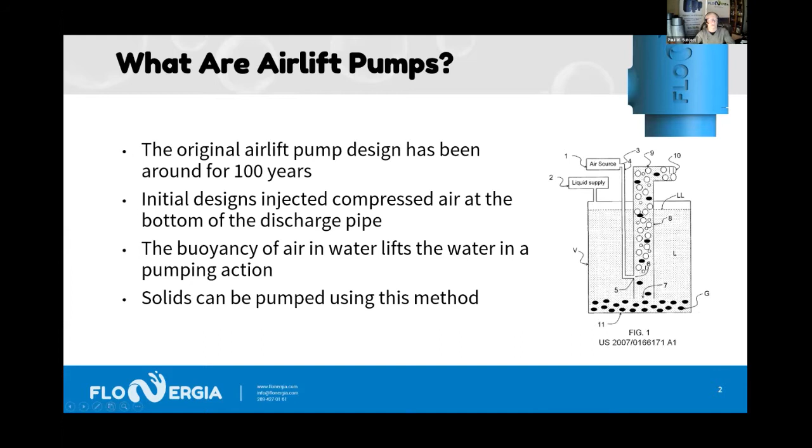So the energy footprint of these pumps is quite interesting. If you think about it, the only motive power is the compressed air, so the energy to deliver that air is the thing that actually drives the pump. There's no separate electrical motor running rotating mechanisms. By buoyancy, the air, which has a lower density than the liquid, causes the liquid to rise fairly quickly, which creates the pumping action. In terms of fluid pressure, the liquid is taken in the ascendant airflow and moves in the same direction as the air. So the physics is quite simple, and the calculation of the volume flow of the fluid is possible based on the physics of this two-phase flow.

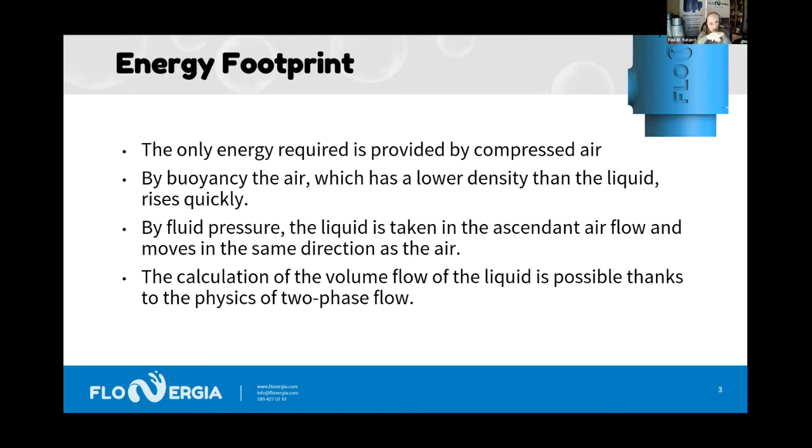So what are the advantages of airlift pumps? Well, they're very reliable. There's no moving parts except for the delivery of the air. Liquid being pumped is not in contact with any mechanical elements. Therefore, the airlift pump is not abraded by anything abrasive, like sand or debris. Additionally, depending on how the air is delivered, airlift pumps actually act as water aeration devices and can lift stagnant bottom water to the surface. Now, since there's no restrictive pump parts, solids generally up to 70% of the pipe diameter of the airlift pump can be lifted.

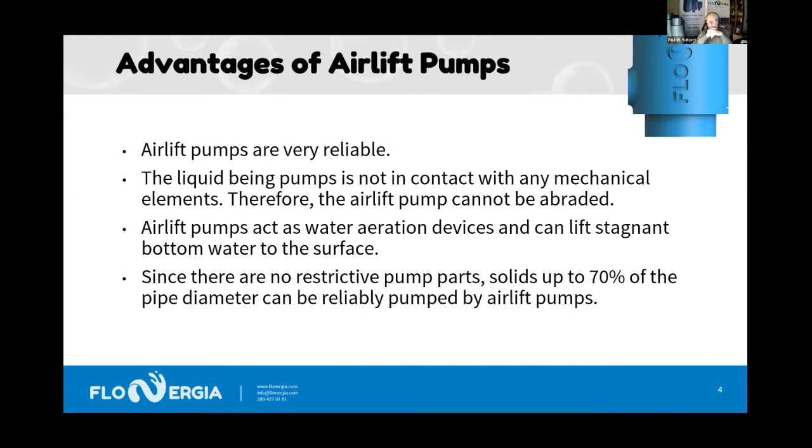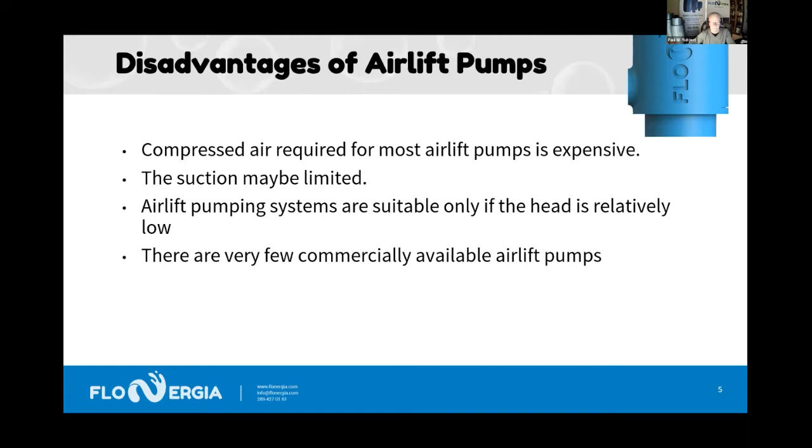All very good, right? Problem is, there's some disadvantages to airlift pumps. Compressed air required for most airlift pumps is expensive to produce. Suction can be limited depending on design. And airlift pumping systems are only suitable if the head is relatively low. And lastly, but certainly not leastly, there's very few commercially available airlift pumps. If you search on the internet, you probably won't find any except for one. This has occurred because the lack of design optimization over the last 50 years shows there's no real advantage using airlift pumps.

New innovations that are out there now have started to solve some of these flaws in the original design. And of course, our company has completely re-engineered the airlift pump to solve a number of these issues. So I'd like to talk a little bit about our technology.

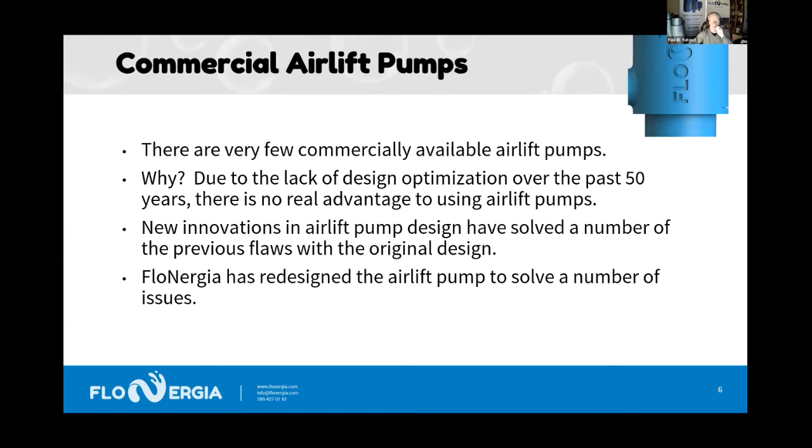Our company was incorporated back in 2016, and the technology that we have commercialized was developed at the engineering department of the University of Guelph in Ontario, Canada. Our patent pending technology is currently being sold to aquaculture, agriculture, and wastewater markets around the world. And in India, Everest Turbo is our exclusive distribution partner.

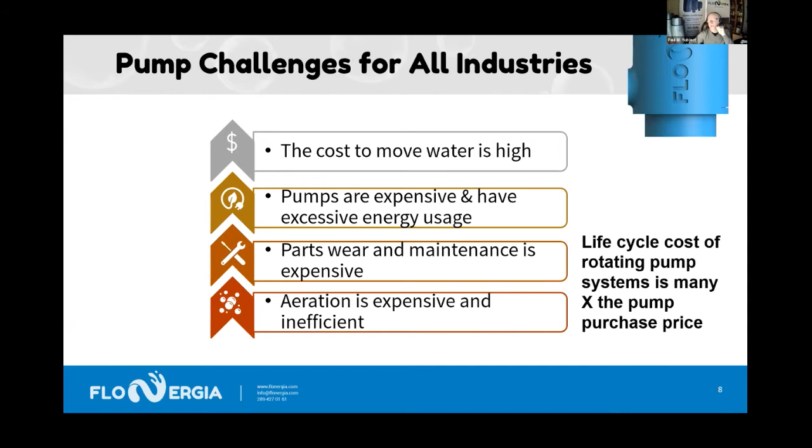Now, as you know, you've been listening to people talk about pumps all day. The challenge with pumps is that the cost to move water is high. Pumps generally are expensive and use a lot of energy. Parts wear and maintenance clearly is a challenge, and aeration is expensive and inefficient. And the life cycle cost of a pump and its rotating systems are many times the initial purchase price.

So how does our technology solve these problems and the problems in general of airlift pumps that were designed more than 100 years ago? Well, our technology only uses the aeration alone to both pump and aerate water. So the energy you use to drive your aeration system or your blower is what's needed to run our pump and aerate the water simultaneously.

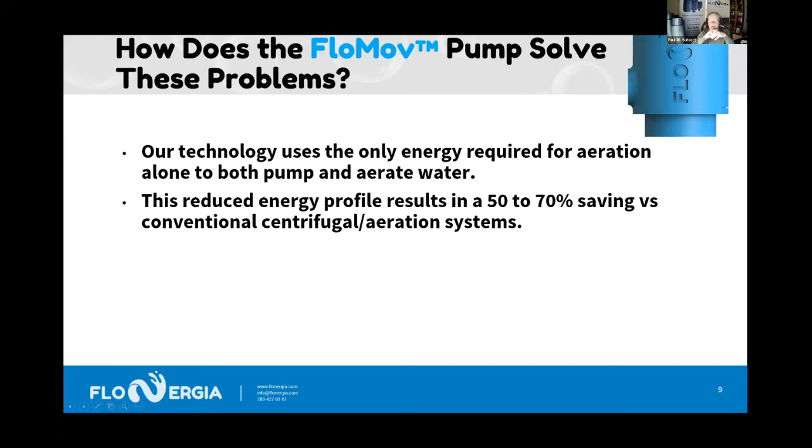This reduced energy profile results in a 50 to 70% energy savings because we're removing the conventional pump out of the system. Our airlift pumps have no moving parts, and as a result, they have very little maintenance. Our airlift pumps have exceptional aeration properties versus conventional systems, generally up to 40% better aeration efficiency versus paddle wheels and surface sprays.

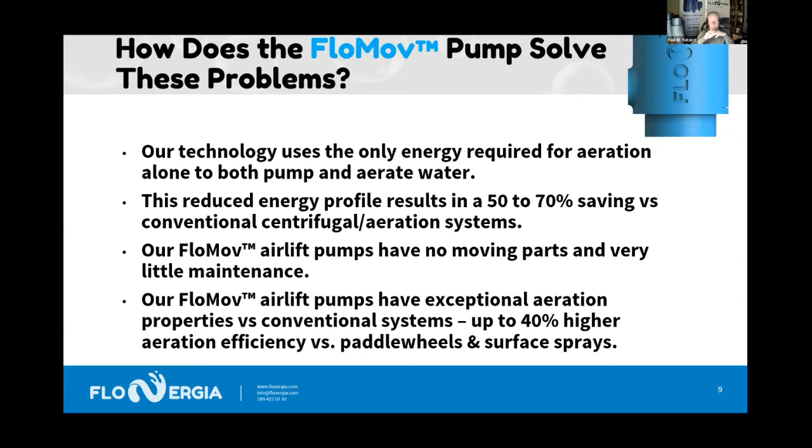So what's different? Well, Josh is going to talk a little bit about this in greater detail, but our pump has been optimized using computational fluid dynamics to flow and aerate simultaneously and to optimize the multiphasic behavior of the pump so that it maximizes the output, but also maximizes aeration. Additionally, we used finite element analysis to design the pump to ensure that it will withstand the operational stresses that we experience on a daily basis.

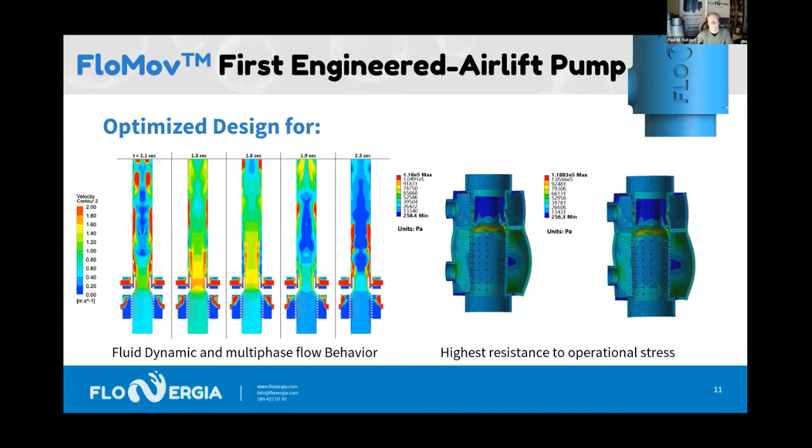So essentially, our airlift pump is the first engineered airlift pump system that's on the market. By removing the actual centrifugal pump and the power to run it, and removing the paddle wheels and the power to run those, and combining those into one system using a standard regenerative blower, our system, with no moving parts, very low initial cost and extremely little maintenance, and a reduced energy profile, results in pumping simultaneous with aeration. And of course, we can pump solids, liquids, and solid liquid mixtures.

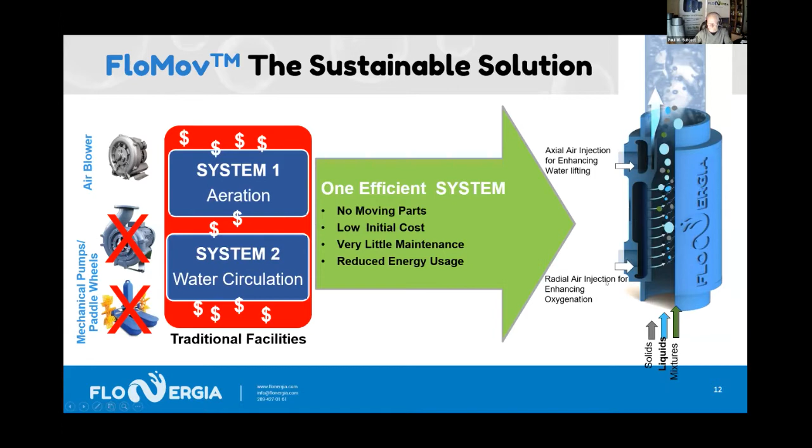You can see a cutaway version of our pump here on the right-hand side of the screen. At the top, you see where we inject air, which creates a piston, or what we call slug flow, of air that lifts the water. And the bottom port is where we inject air to enhance oxygenation and aeration. So by using the power required from the air itself to generate the airflow and from the blower, we lift and aerate simultaneously. There's no additional power needed to pump water. This results in a 50 to 70% energy savings, 40% better aeration efficiency, and substantially reduced maintenance, essentially zero.

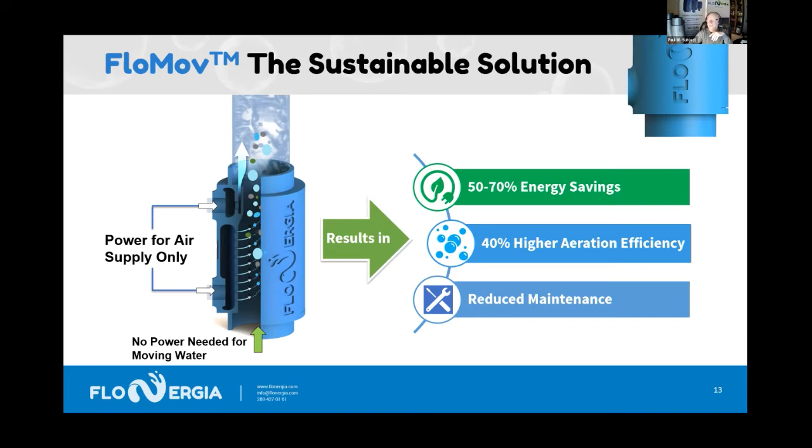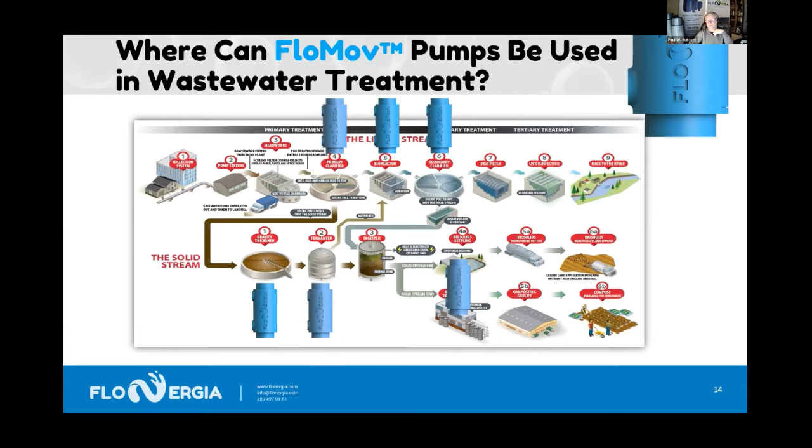So talk about some applications, and Josh is going to talk in greater detail about some of these. Our pumps can be used throughout every operation where you need to move water from one location to another. But I've chosen wastewater here because it's an easy application for our technology. So we can be used to transfer fluids from one location to another, to pump heavier materials, and to deal with sludge.

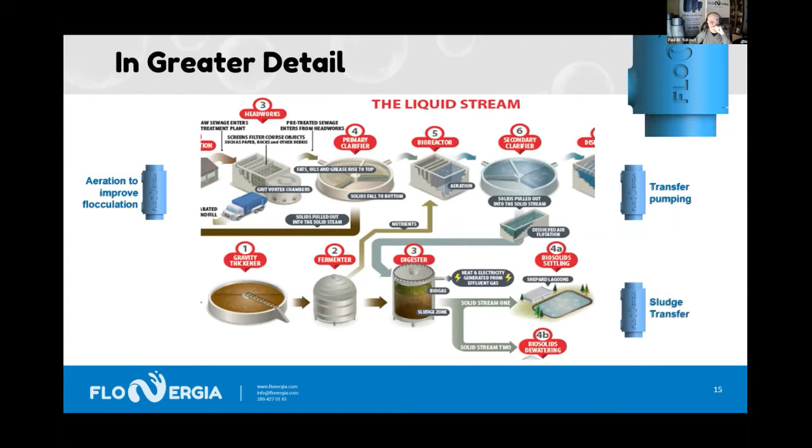So looking in greater detail, if aeration is required to improve flocculation in a waste stream, our pumps can do that. To transfer from one tank to another tank, our pumps can do that. And to transfer heavy sludge, heavy materials, and Josh will talk about the materials we can pump with our technology, our pumps can do that.

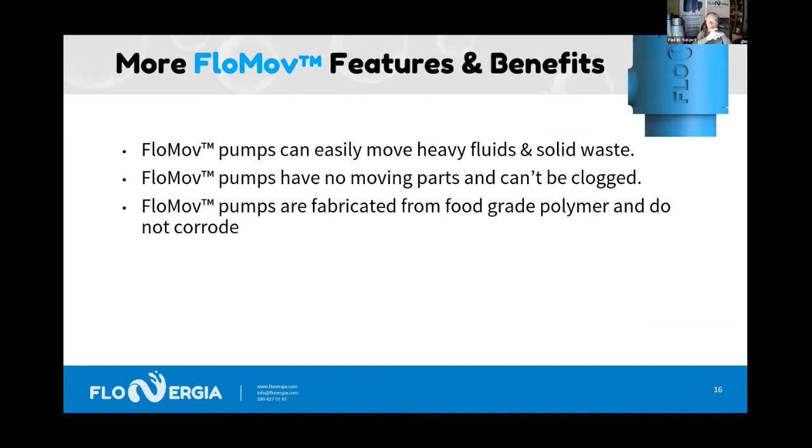So some additional features and benefits. As I said, our pumps can easily move heavy fluids and solid waste. We have no moving parts. It's very difficult to clog our pumps. As a matter of fact, we pump fish in the aquaculture business. Our pumps are fabricated from food-grade polymer and can't be corroded. Our pumps facilitate carbon dioxide removal if that's a necessary part of your process. Our pumps disrupt thermal stratification because of the upwelling nature of how our pumps work, and our pumps improve dissolved oxygen. We have pump capacities in a range up to 2,685 liters per minute, which is 44 liters per second.

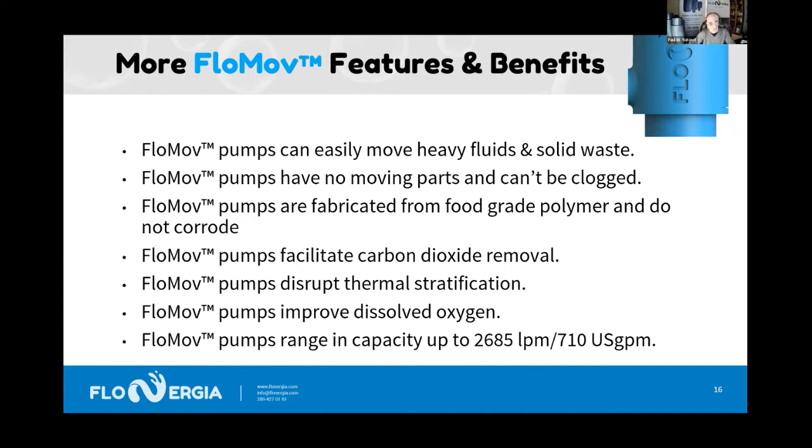Spend a little time talking about our size range. Of course, we have pumps up to 8 inches in size, and the 8-inch size is the size of the pipe that the pump uses. Our smaller pumps, we have a small 1/2-inch pump, which is used by aquarium people. Actually, it's a very cute little pump. Josh, do you have a 1/2-inch pump there that you can hold up? Probably not with me here now. Okay, as you can imagine, it's about as big as your finger. It's a great little piece of technology.

But our 1/2-inch, 1-inch, and 2-inch units are printed in 3D food grade polymer. And our 4, 6, and 8 inch units, and I have the 6 and 8 here beside me, these units are made of standard PVC piping material, and they're fabricated. All of our pumps are currently manufactured here in Canada.

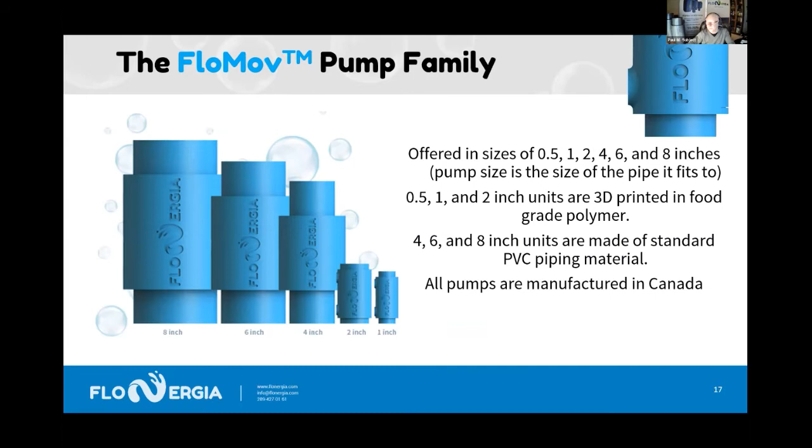Spend a little time on our pump curves. These pump curves are a little different than probably what you're used to seeing, but they show the airflow rate across the x-axis and the resultant water flow rate across the y-axis, both in liters and gallons per minute, and in cubic feet per minute and liters per second in terms of airflow.

Josh is going to spend a bit of time talking about the efficiency ratio, which we call the submergence ratio. But you can see the curves here for each one of our pump sizes. Essentially, at the 50% submergence ratio, our pumps start to work up to the 90% submergence ratio. Below 50%, our pumps are not really that effective. Josh is going to talk more about how you read this curve and when you use this curve in a few moments. The top rate is the airflow required to operate the pump, and this is the resultant output on the y-axis.

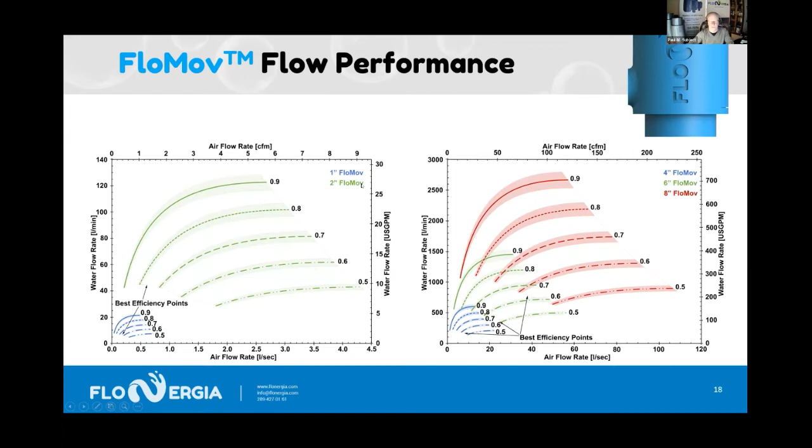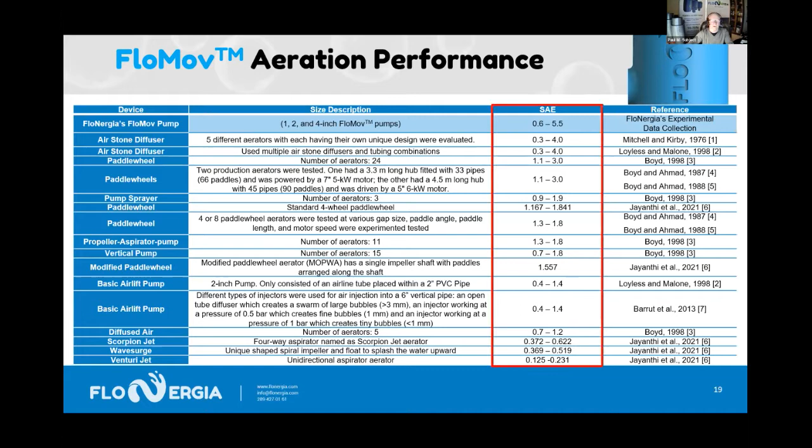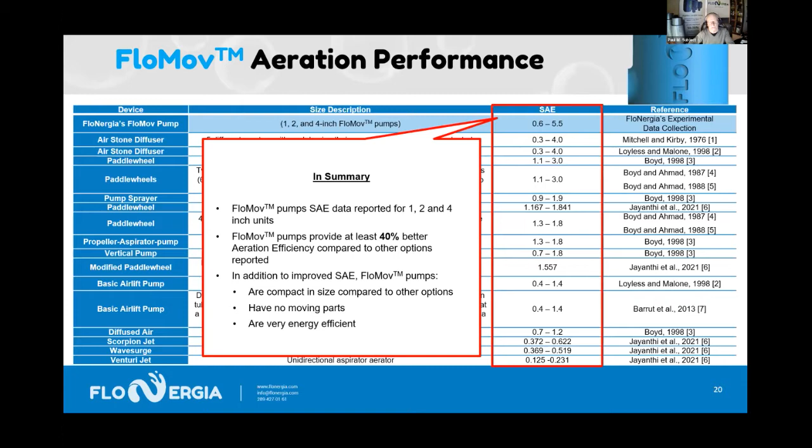Just to spend a few moments on aeration performance, because that's a fundamental component of our technology, we compared our 1-inch, 2-inch, and 4-inch FloMov pumps to a number of different types of aeration systems using the standard aeration efficiency, which is the typical standard used in aeration technology. What we found is that our pumps delivered 40% better performance than all of these other types of systems, including diffusers, paddle wheels, surface sprays, and venturis. So in one device, you get both pumping and aeration, which we think is quite interesting, with no moving parts and extremely energy efficient.

I'm going to talk about a few particular examples of where we're installed around the world, where we have more than 100 installations of our technology. In Canada, in an aquaculture operation, we've got a 40,000 gallon tank where we're pumping 3,600 gallons per minute. In Chile, at a company called AquaChile, the second largest salmon producer in the world, we have an 80,000 gallon tank where we're pumping 9,600 gallons per minute. One of our installations in India is a wastewater settling tank where we transfer heavy sludge, a 10,000 gallon tank at 120 gallons per minute.

So our approach to the global market is quite simple. We have direct sales to key customers. We do license our technology in certain jurisdictions, but we really have partnerships with consultants, engineers, and system designers, and primarily our distributors. In India, of course, that's Everest Blower. Together with our colleagues at Everest, we'd like to work with appropriate companies to find customers for demonstrations and to work with customer engineers and consultants for easy integration into their existing systems.

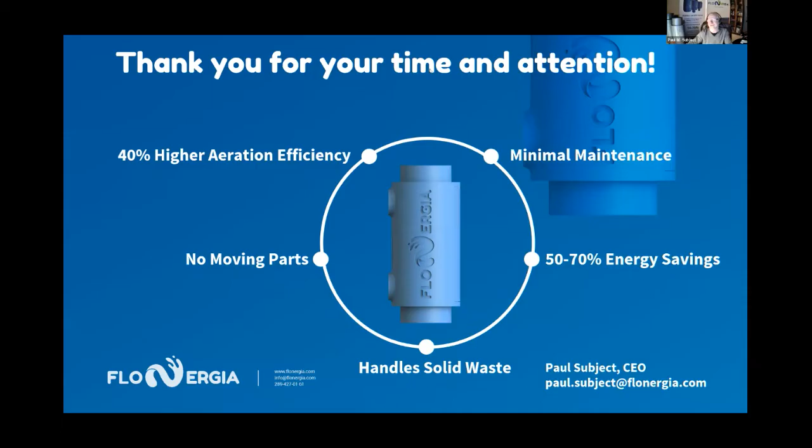That's the end of my presentation. I'm going to hand over the presentation now to Josh, and he'll talk about how you actually apply our pumps on a regular daily basis, actually how he does it every day. Go ahead, Josh. Thank you, Paul, for that great presentation.

Thank you all for coming to listen to our presentations. As Paul mentioned, I'm the application engineer at FloNergia. I'm going to be running through an introduction to the application of our Airlift pumps and going over some of the technical data for operating our pumps, how to set up and install our pumps, as well as maintaining our pumps.

As Paul mentioned, our Airlift pumps are a great energy efficient solution because we combine two systems into one. By using the air blower from the aeration system and injecting air into our Airlift pump, we can pump and circulate water while simultaneously aerating the water.

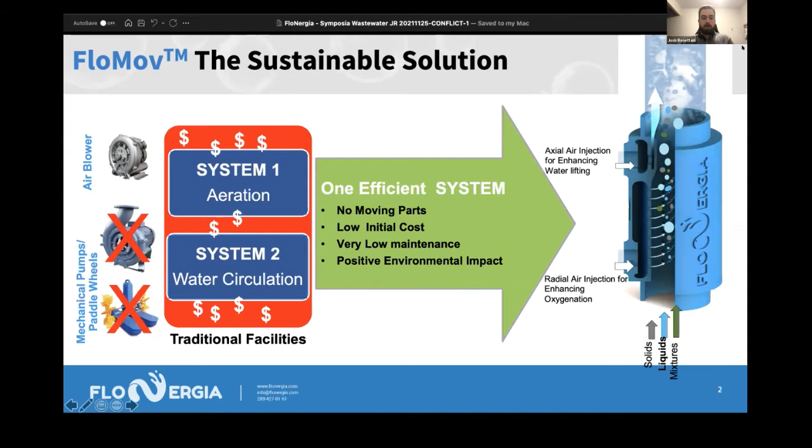Some applications that our Airlift pumps are great for include aeration pumping, aquaponics, fish farming systems, hydroponics, heavy liquid pumping, and wastewater pumping—pretty much any application that needs to transfer fluid from A to B. It doesn't really matter what fluid that is. We've pumped heavy metals with density 6 times that of water. We've also pumped sludge and slurries in the lab with highly viscous shear forces acting on the flow. Any kind of liquid our pump can handle.

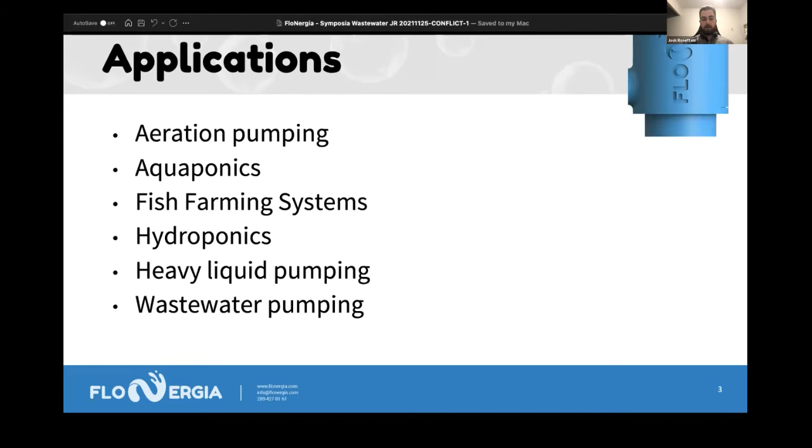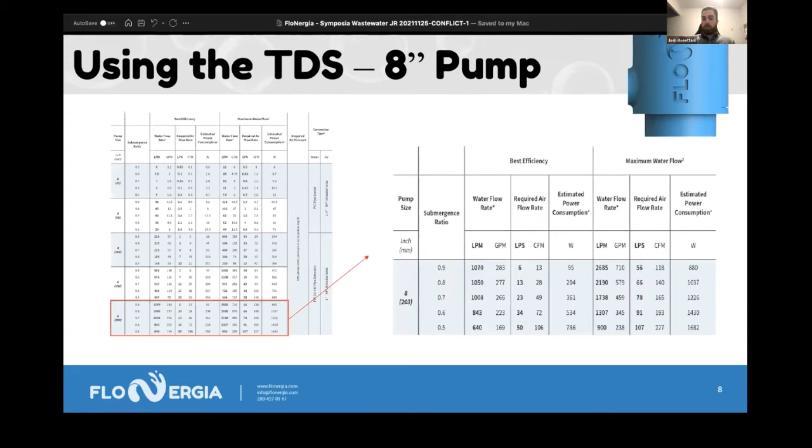The submergence ratio, by definition, is just the static head divided by the total length. The total length is made up of the static lift and the static head. The static head is how deep you place the airlift pump at the point of injection under the water level, and the static lift is how high above the water level you want to pump the water.

Let's look at an example where we keep the static head constant, say at 1 meter, and start increasing the static lift. By definition, when we keep the static head constant and increase the static lift, we're reducing the submergence ratio. So when we want to move water, we need to inject more air or energy into the pump to overcome the static lift. That's why as the submergence ratio slightly decreases, the performance decreases as well, because we need to overcome the static lift.

So a few examples of calculating the submergence ratio: let's say the static head is 4 meters and the static lift is 1 meter. Then the static head divided by the total length is just 4/5, which is 80%.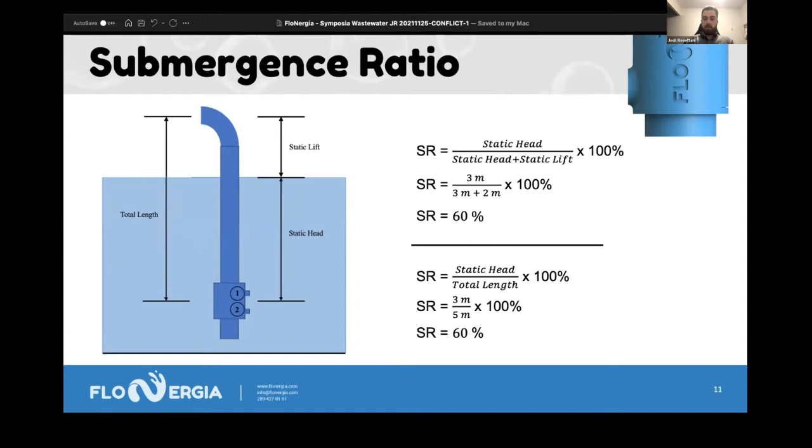Another example: let's say the static head is 3 meters and the static lift is 2 meters. Then the static head divided by the total length is just 3/5. And that's how we go about calculating the different submergence ratios of the systems we work with.

For customers, the pump performance curves, as Paul showed you earlier, highlight the table we just discussed, as well as the different submergence ratios. The figure on the left shows our 1-inch and 2-inch pump, while on the right is our 4, 6, and 8-inch pump.

The y-axis is the water flow rate, and the x-axis is the air flow rate we need to inject into our pump. Each size pump has 5 curves, one for each of the different submergence ratios that can be used, which we just discussed how to calculate. For each curve, the beginning highlights the best efficiency point, and the tail end is the maximum water flow rate achieved for each size pump at each submergence ratio.

To run through a quick example of how we use these charts to size our airlift pumps: let's say we have a customer that needs 100 liters per minute of water flow rate. We could draw a horizontal line across from the water flow rate, and if we're operating at 0.9 submergence, find the intersection point and draw a line vertically downwards to see how much airflow we need to achieve the 100 liters per minute. At 0.9 submergence, if we inject 0.9 liters per second of air, we can achieve the 100 liters per minute. However, let's say the system is operating at 80% submergence.

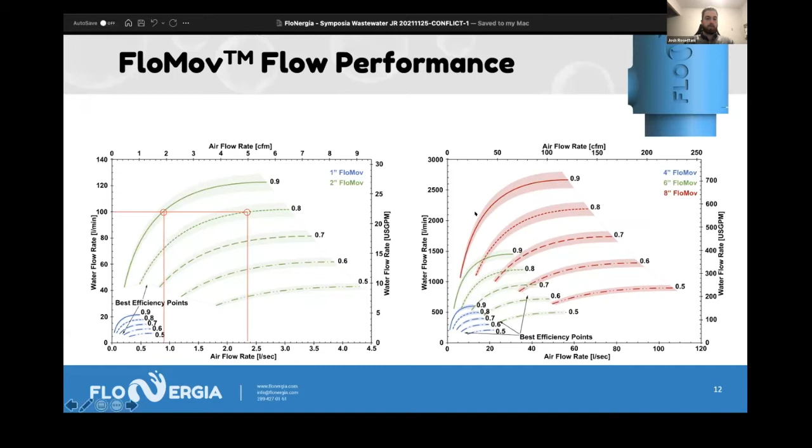Then we continue to draw that line across from the 100 liters per minute till it intersects the 0.8 submergence line. From here, we draw the line downwards, and we see that we need approximately 2.35 liters per second of air at 0.8 submergence to achieve that same 100 liters per minute. That's how we read our pump performance curves.

Now, to get into the setup of our airlift pumps, we designed them to work well with just PVC piping and fittings, so they can be commonly used across the world. So the materials needed are just PVC piping, elbows, and some coupling or flexible coupling to assemble our airlift pump system.

To operate the pump, we need a blower or an air source to move air through air lines that can be injected into our airlift pump through some hose barb or push connect fittings.

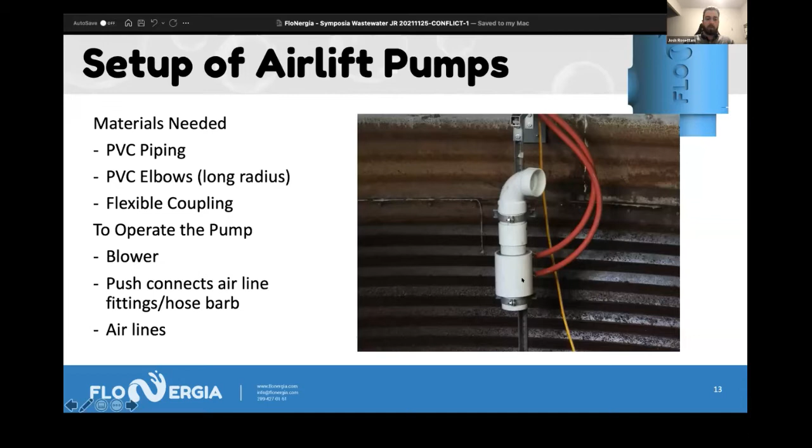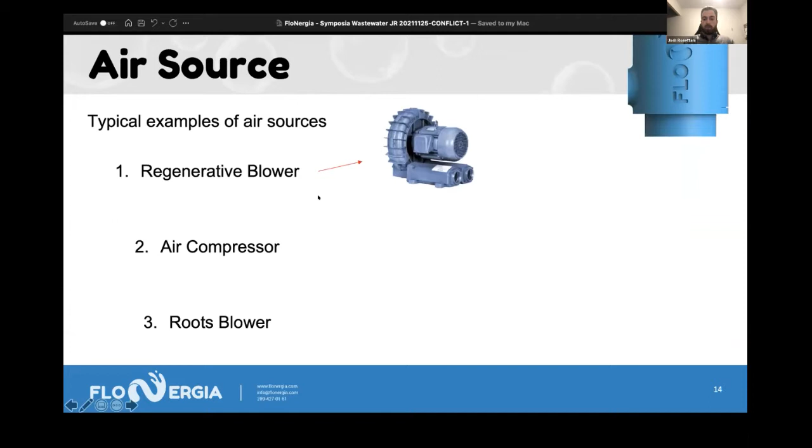Looking at the air sources that can be used: one is a regenerative blower, which we typically recommend to all our customers, as this is probably the most efficient way to generate a high volume of air at low pressure. Other air sources can be an air compressor or a roots blower that generates air at high pressure. We like to recommend the regenerative blower because most of our applications are at low pressure, so we can generate high volume at better efficiencies.

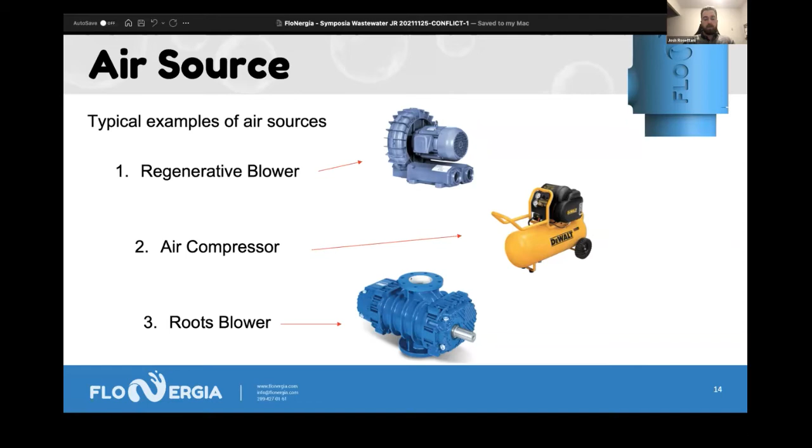So I'm going to go through an air blower curve to see how much volume of air we can generate from a regenerative blower. This is just pulled off the internet and is typical for regenerative blowers, and it corresponds to our airlift pumps, because then we can see how much air we can generate and how many airlift pumps we can hook up to one blower.

For example, if we place our airlift pump 1 meter below the water surface, the hydrostatic pressure in the system is going to be that 1 meter, or 40 inches, of water column pressure. Similarly to our pump curves, the pressure is on the y-axis instead of water flow rate for these air blower curves, and the x-axis is the volume of air that can be generated. So at 40 inches of pressure, we can draw the line horizontally across to intersect the model of the regenerative blower we're using.

For this case, we're just going to use the red dotted line. We find the intersection point and draw our line downwards to see that for this model, we can generate 80 CFM, or 37 liters per second. So from here, we can look at our pump performance curves and see that we can get 37 liters per second from the regenerative blower. How many airlift pumps can we hook up to one blower?

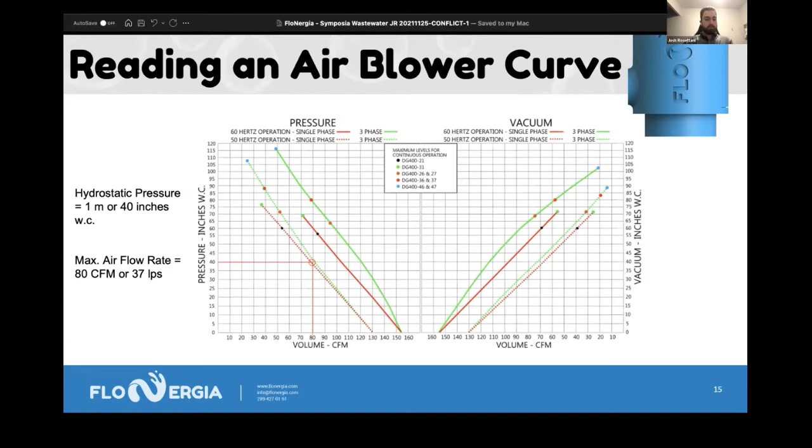Next, I'm going to get into the installation process of our airlift pumps. Each airlift pump comes with an engraving of an arrow pointing towards our axial injection port. We want to orient the arrow pointing towards the surface of the water so that the pump is pumping water vertically upwards, with the axial injection on top.

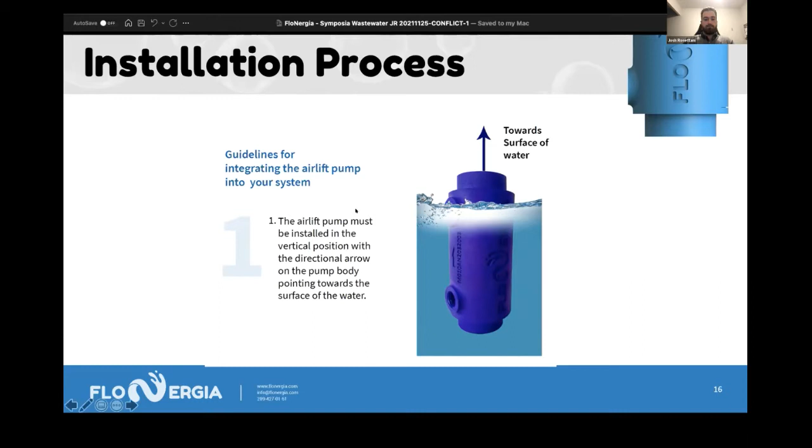Each of our pumps has threads to fit either push connects or hose barbs to connect air lines later in the process. Because our pumps are designed to fit well with PVC piping, the PVC pipe can just be fitted into the top of our airlift pump. But to secure the piping and system, we suggest using flexible coupling so that later on, if we need to remove the pump, we can.

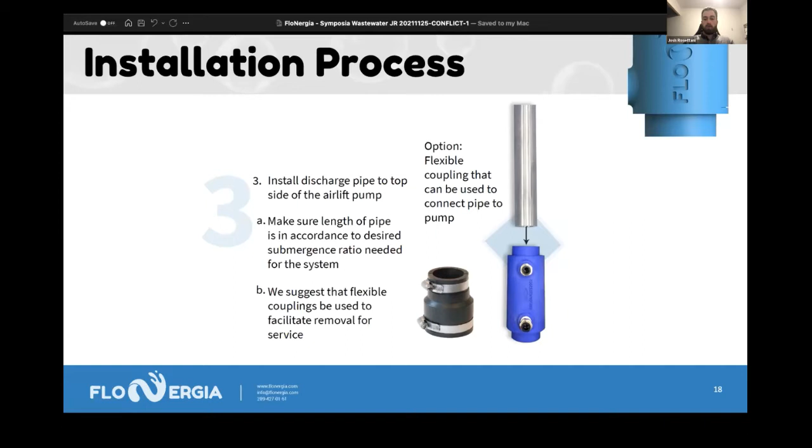Then at the top of the riser pipe, we can install a 90-degree elbow just to direct the water flow coming from the riser pipe.

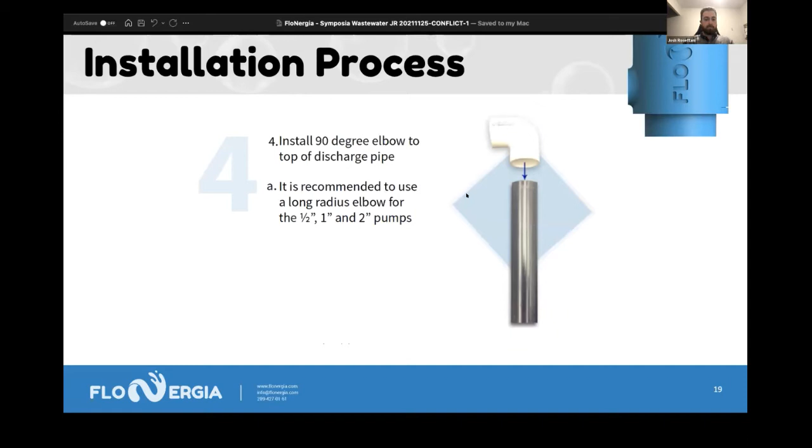Next, for some applications, we can also install an intake pipe at the bottom of the airlift pump. This is generally for applications where we want to pick up solids off the bottom of the tank. We place the intake pipe at the bottom of the pump so its inlet is at the bottom of the tank, where solids can be suctioned up the pipe and then pumped through our airlift pump.

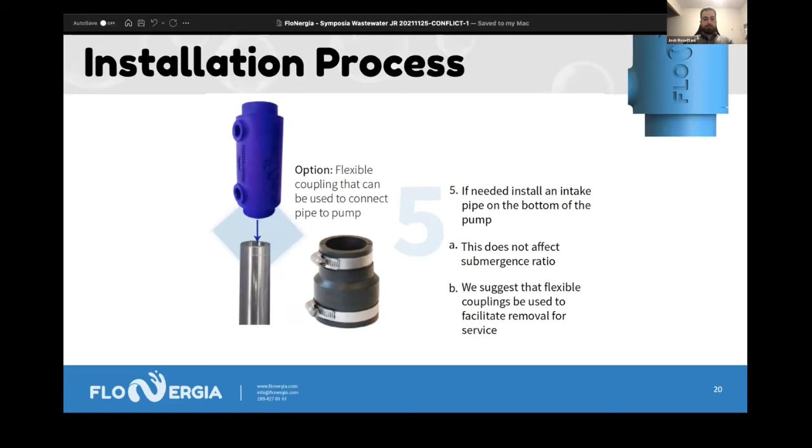Lastly, we connect the air lines from the air source into the two injection ports of our airlift pump.

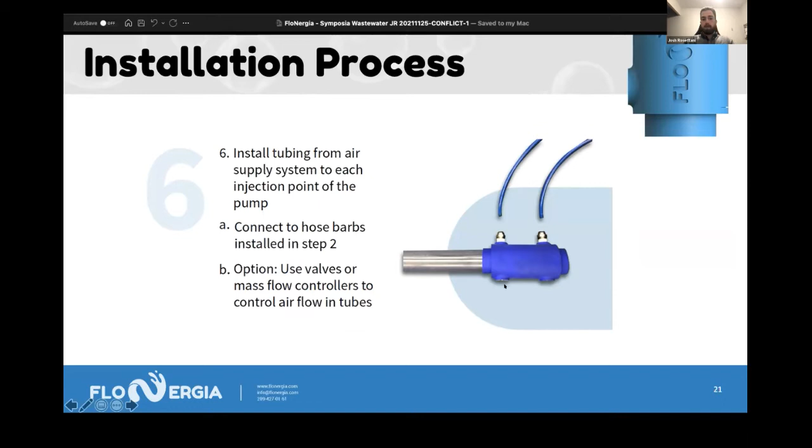Here's another example of our airlift pump system. We have four 4-inch airlift pumps that were placed into a raceway system here in Canada. We also need to build a frame or support system, using pipe clamps to secure our airlift pumps to the frame. In this case, since it was a raceway, we could just secure our pumps to the frame and submerge it under the water, which helps stabilize the pumps and keep them vertically straight.

This frame can be made out of any locally sourced material, just to secure our pumps to the frame so that they're not moving while in operation.

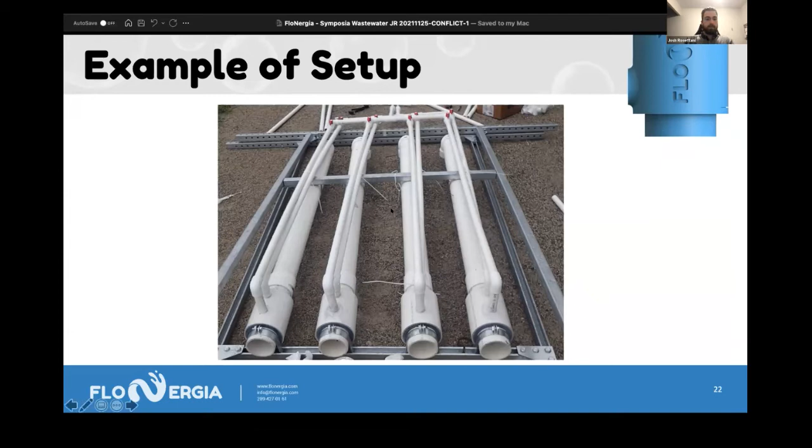So we've been talking about our dual injection airlift pump. Paul briefly mentioned that each port has its own purpose. Our axial air injection, when we inject the air, is directed vertically upwards to enhance water lifting, and this enhances the flow pattern seen inside the pipe. When we talk about slug flow, it's a large bubble that acts as a piston inside the pipe riser, lifting the water above the slug bubble.

So we use the axial air injection to enhance water flow, while the radial injection is comprised of small holes that, as air passes through, create bubbles, enhancing oxygenation in the water. Each port was designed specifically for its purpose: water lifting or oxygenation.

For most applications, we recommend 50% of the air go through the axial port and 50% through the radial port. However, if customers are more concerned with increasing liquid lifting, we'll recommend putting 75% of the air through the axial port and the remaining 25% through the radial port. If the customer is more concerned with increasing oxygenation in the water, we'll recommend 75% of the air go through the radial injection and 25% through the axial injection.

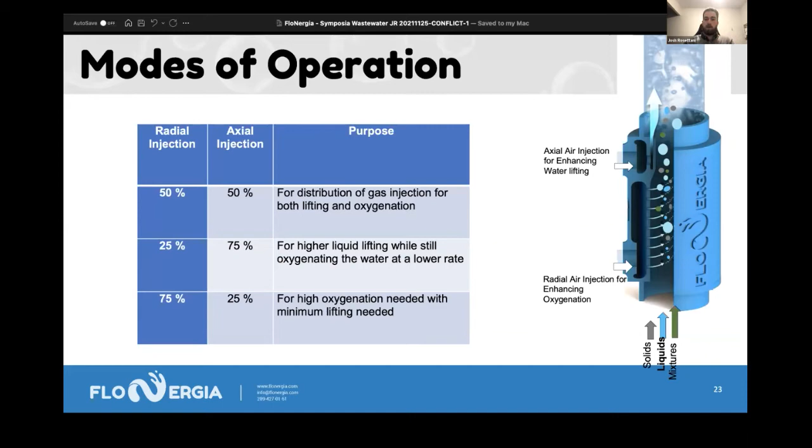Now to get into some of the maintenance and troubleshooting - there's very little maintenance, but these are just suggestions in case problems arise. If there's airlift pump blockage, we recommend shutting down the system, emptying the water, and turning on the air from the air compressor or regenerative blower - the pressurized air will unclog any blockage in the airlift pump. Another issue is biomass buildup: you just remove the pump, and with a suitable cleaner, you can remove the biomass by wiping and cleaning the pump.

The next issue is maybe there's insufficient submergence ratio. So we could just shut the air off, let the water settle, and see where the static water level is, then we can calculate the submergence ratio to see if that's where we want it, and if we need to add or remove any water.

Next is maybe there's insufficient airflow to the pump. So we recommend checking the air lines, making sure there's no knots or anything obscuring the lines getting air to our airlift pump. Or you may have to look at the air source and see if the blower is not working at full capacity.

So these are just some troubleshooting ideas, but when it comes to our airlift pumps, because of the no moving parts, there's very little maintenance. We've had pumps working around the clock for 5 years, and they haven't been serviced yet. There's been no maintenance issues with our pumps.

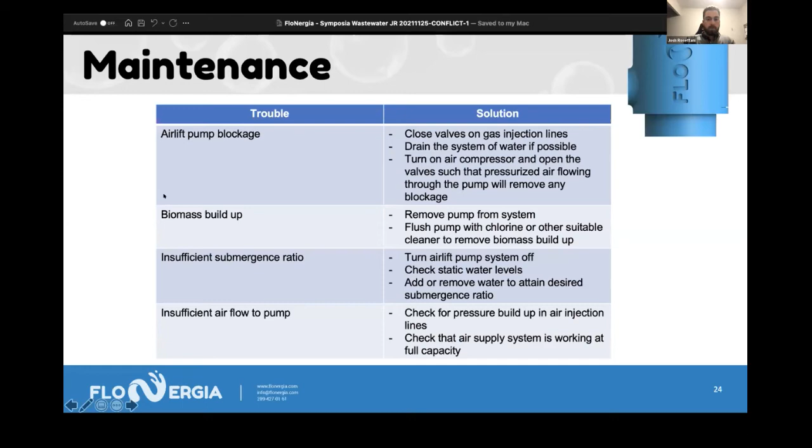So now to look at some system configurations. We had a customer here in Canada that came to us with a 151,400 liter tank. They needed a turnover rate of twice per hour. Looking at the size of the tank, we figured they needed a 5,300 liter per minute flow rate. Our solution was two 8-inch airlift pumps, and with that we achieved the 5,300 liters per minute, and the customer was satisfied. These are the two 8-inch airlift pumps in a raceway system.

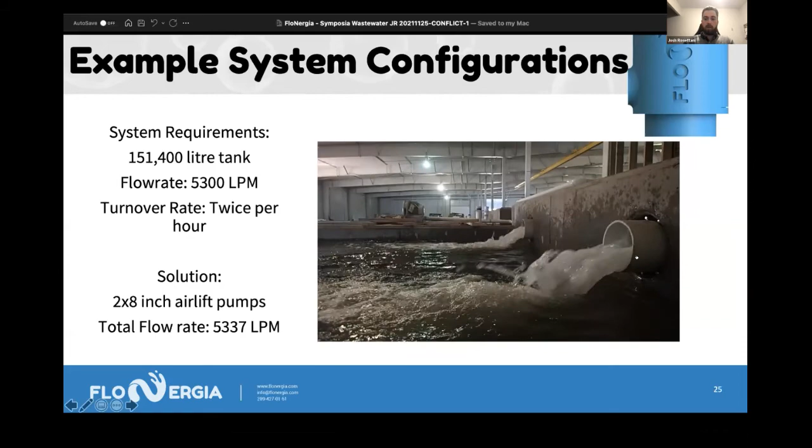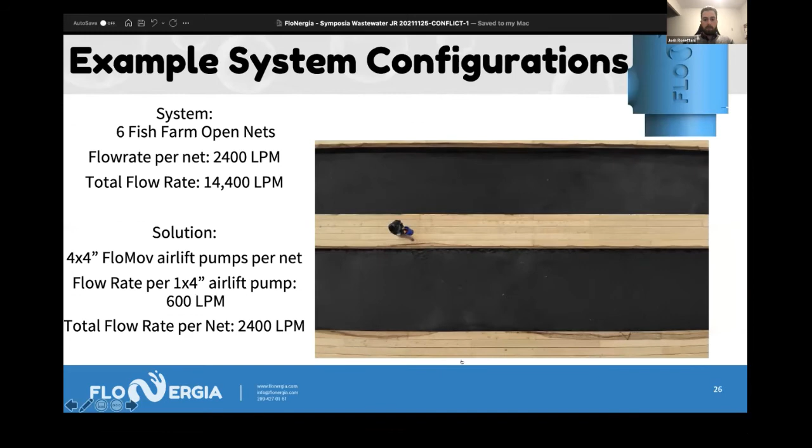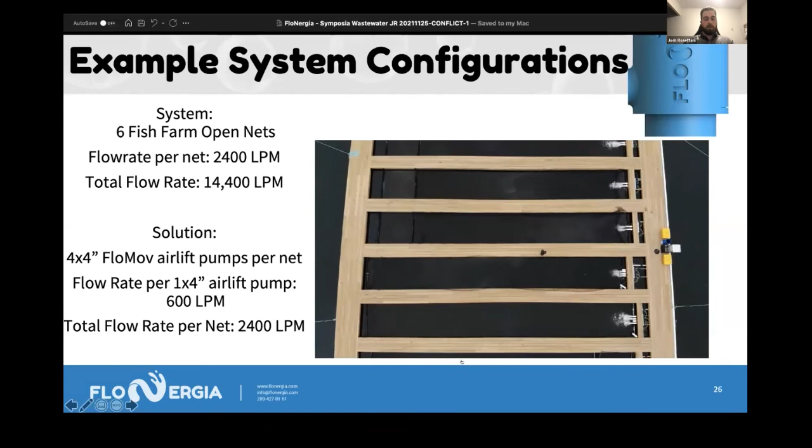Another system was a customer who was designing open net fish farms in a quarry lake, and per raceway they needed 2,400 liters per minute for a total of 14,400 liters per minute of water flow. Our solution was to use 4 4-inch airlift pumps per net. Each airlift pump had a 600 liters per minute water flow rate, so the total flow rate per net was 2,400 liters per minute. This was our large system here in the video, with each raceway incorporating our airlift pumps.

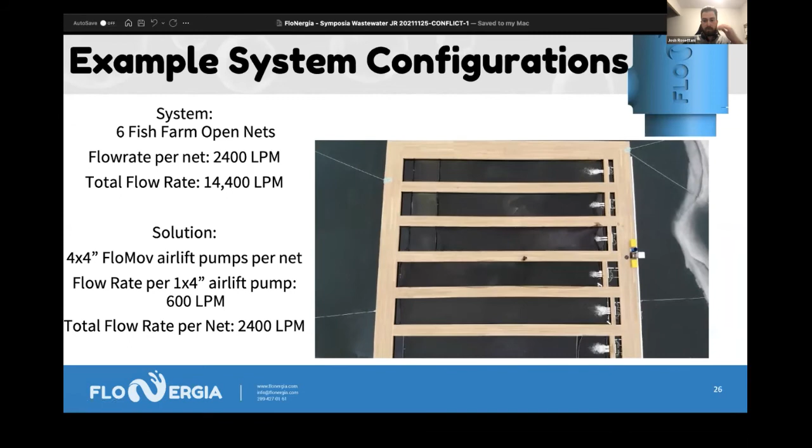As Paul briefly mentioned, one airlift pump limitation is high lift pumping. When we discuss the submergence ratio and the static lift, this is where high lift pumping can become a problem, because when you increase the static lift, you're decreasing the submergence ratio. When you increase the static lift to a point where the submergence ratio falls below 50%, our pumps become inefficient and have very minimal water flow rate.

Another limitation is high pressure systems, where there need to be lots of bends and turns in the piping network. Our airlift pumps are limited, as the pump operates off the buoyancy effect of compressed air to move the water vertically upwards. However, our airlift pumps are excellent at pumping high volumes of water at low pressure, for transferring any kind of liquid from point A to point B.

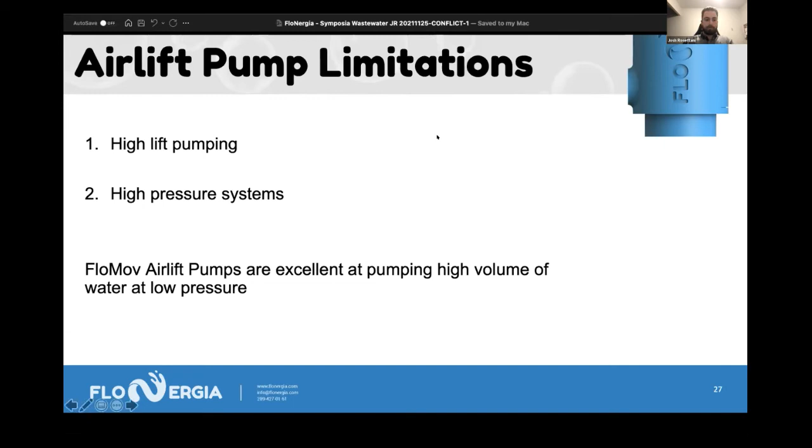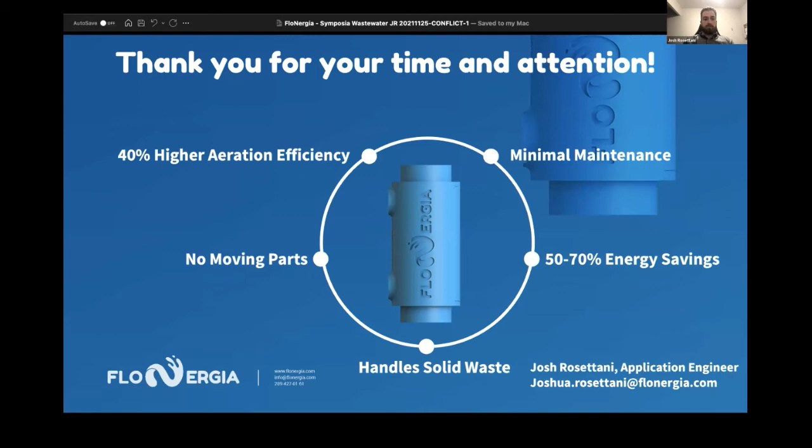So thank you for your time and attention today. On the screen are just some of the highlighted benefits of our airlift pump that Paul has mentioned, and we'll both take any questions you guys have.

Thanks, Josh and Paul. We do have some questions for you. One of the questions that has come up first, Paul, is what is the technical difference between an airlift pump and an air compressor pump?

That's a great question, Kailash. I don't actually know. I'm not familiar with what an air compressor pump is. An airlift pump essentially uses the pressure of air to raise and pump water. I've not seen that before. I'd be happy to look one up. Josh and I will look one up, and we'll get back to you with an answer.

Another question is, what is the required inlet working pressure for this pump? So I can answer that. It's just the depth at which the airlift pump is placed under the water level. So when we deal with pressures with our airlift pump, it's just hydrostatic pressure from placing the airlift pump under the water level. And so we match that pressure with the air source to be able to inject the air.

Kamlesh Kumar is asking, can this pump be used in a horizontal position? No, it has to be put in a vertical position.

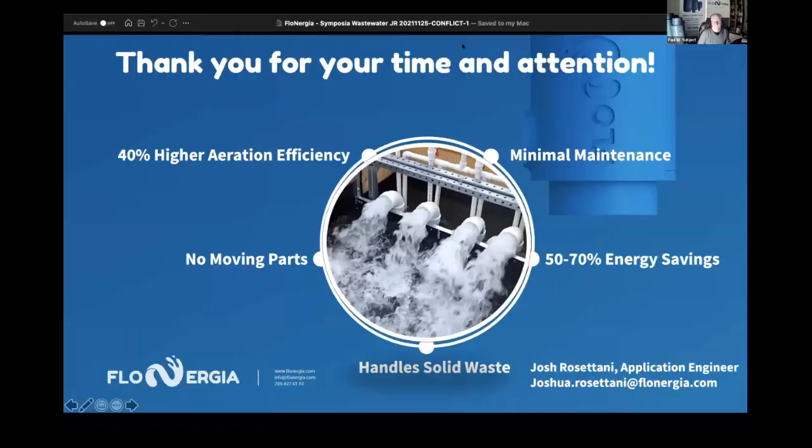So the pump can be placed submerged, or it can be placed on the outside of the tank, but the inlet still needs to be below so that the water can fill up in the pump riser.

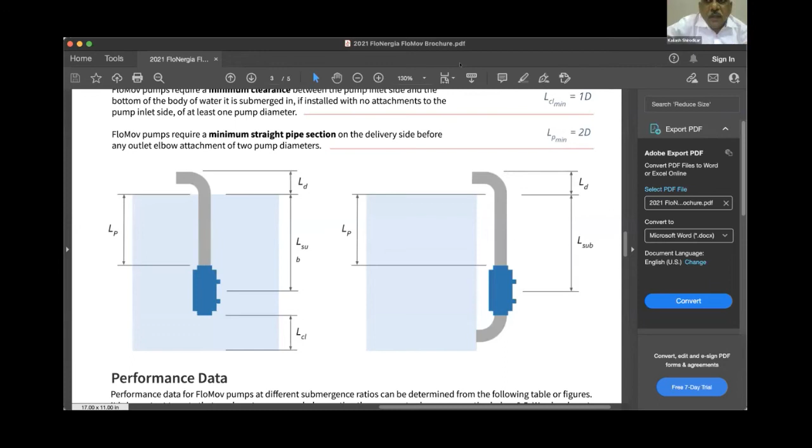Rupesh Kumar is asking, what about protection at the bottom of the pump? How much clearance is required? That's a great question. Considering that we can pump fish, there's no protection at the bottom of the pump required, unless you want to prevent something from going into the bottom of the tank or bottom of the pump, because we do pump solids with it. So we don't put a screen at the bottom of the inlet at all.

What is the maximum head generated from this type of pump? Josh, you want to answer that? So it all depends on the submergence ratio. If you want to place the pump 5 meters below the water surface level, then the maximum lift we can achieve is 5 meters. If you want to place the pump 3 meters below the water level, then the maximum static lift is 3 meters above, because we're getting the minimum submergence ratio of 50%. So the head is just how deep you place the airlift pump, and that can change from each application.

Another question from Girish Panchal is, can these pumps be used for residential applications for transferring water from an underground tank to an overhead tank in buildings and bungalows? The answer is yes. It'll be on a case by case basis. It will depend on the depth of the underground tank and the height to which you want to lift the water. As Josh said, if you've got a tank that's 5 meters deep, then we can raise the liquid 5 meters above the surface of the water.